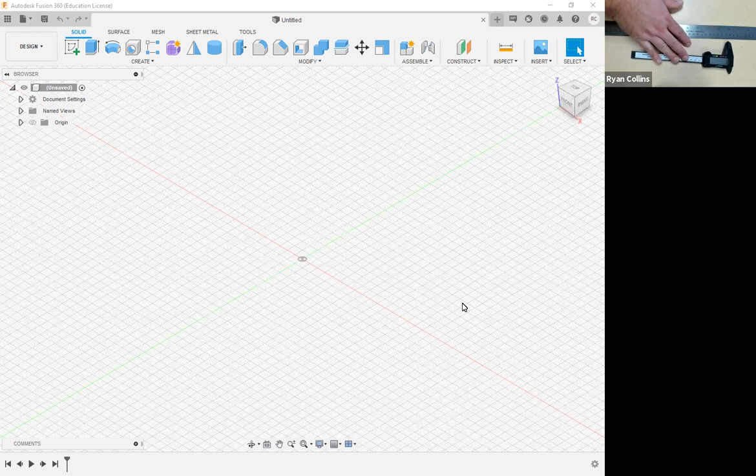Okie dokie. So like I said, going to be starting modeling a hinged object, in this case, a lidded container. Still going to have two components, top and bottom, imported hardware, but I want to build it as a case for my very, very nice Harbor Freight digital caliper. Whatever, it still works, and that's all we need.

Okay, so like we've been starting with a lot of this stuff, I like to build a reference box first. Now I'm just going to build a really quick form of this guy here. So what I'm going to start with is just building. How long is this thing? This is 240 millimeters long, and that thing is about 15 millimeters wide. Cool, cool, and cool. So I'm going to start with a sketch. Basic part. Start with a center rectangle.

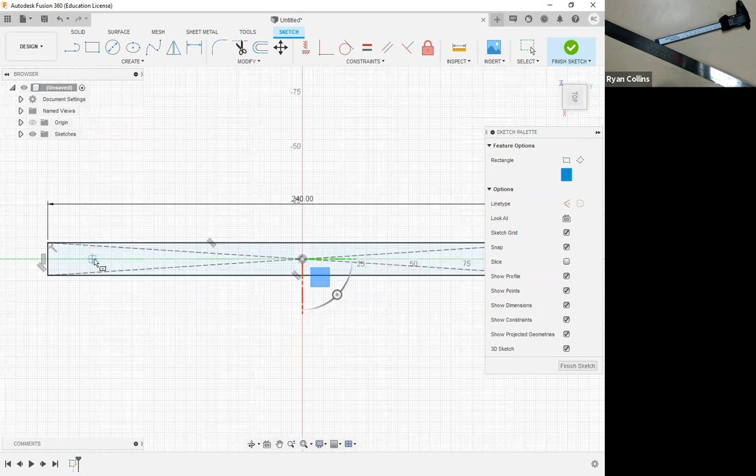Our old favorites. What did I say? 15 wide. 15 by 240. Then it'll have this box here, which is about 30 by 60. Right click, make another one. Let me go to the top just so I can see what I'm doing here. Somewhere there-ish. We will build that better.

What did I say? It was 60 by 30. That'll get moved. Somewhere-ish, and I'll figure that out in a minute. Then I'm going to build this quick little reference here. Again, I'm just building this as a quick reference. Let's see. That whole thing is basically 80 by 30. Something of that out to this. 80 by 30.

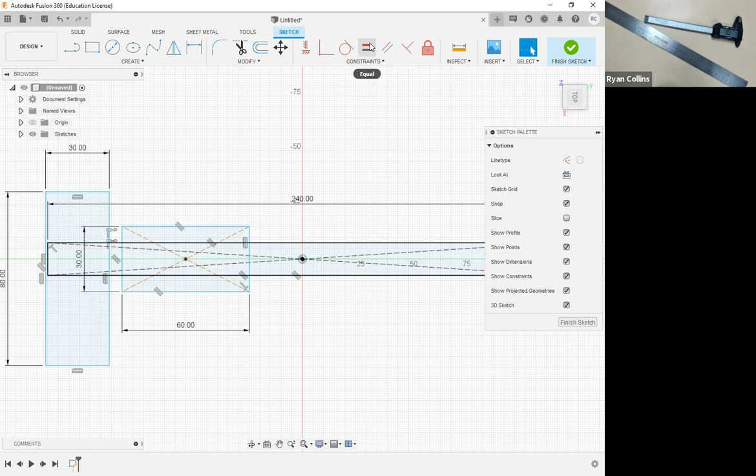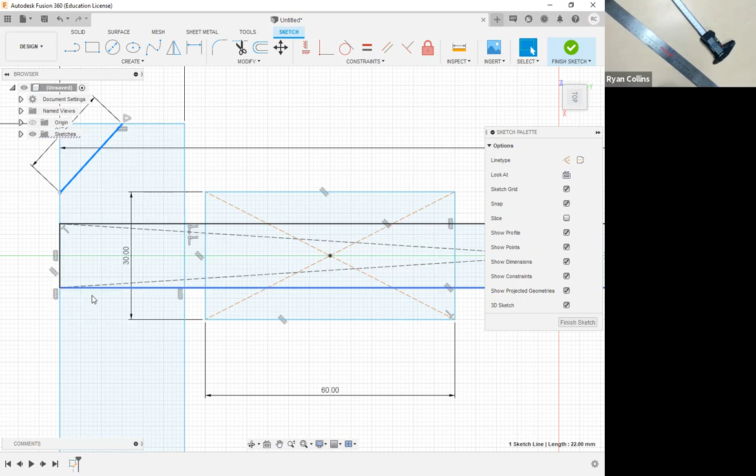I will use some constraints to snap. No, not a coincidence. I'll just move this thing over. Move that over till it intersects with that line. Array for things and stuff. And then just a couple of triangles just to kind of throw that together. Where's the center? Right about there. About 20, so we'll pretend that's about there. Roughly, we'll say 22. Cool. Same. Do something to that effect. Again, I'm just throwing together a quick little reference here. It's not going to be exact by any means, but it's going to give me a pretty good idea.

Model something right through the middle. I'm going to use a construction line as my mirror line so that I can mirror those things. There we are. Select my mirror line. Snap over there. Friggin' hooray. Sort of kind of ish. A pair of calipers. Do some trimming here. Again, obviously you'd want to be a lot more exacting, but I'm just throwing this together so that we can move on with the evening.

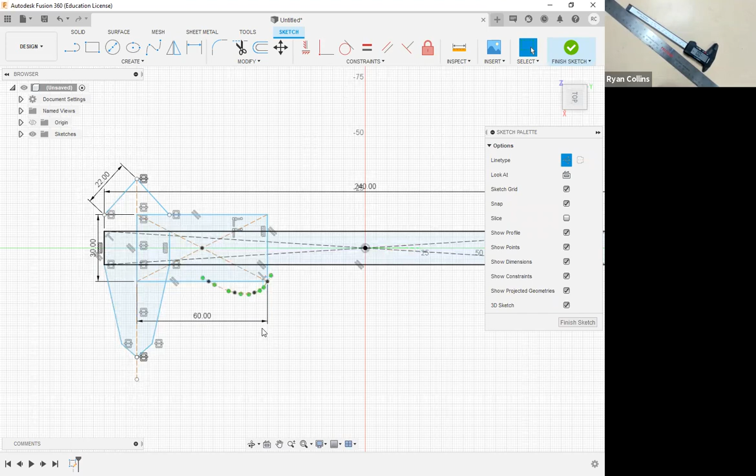And make sure I select my center. Move. That is going to be roughly there-ish. Yeah, there-ish. That seems sort of kind of correct. And yeah, there's a little doodaddly there. So we'll pretend that's the little thingamabob. Did that not connect? Yeah, it's fine. Okay, oops, that is as a construction, change it back over to a solid, super friggin' duper. Okay, so that is roughly a pair of calipers. And same there, that ought to do. Dang it, keep forgetting to turn off the construction line. Okay, so there is roughly an outline for my caliper, finished there.

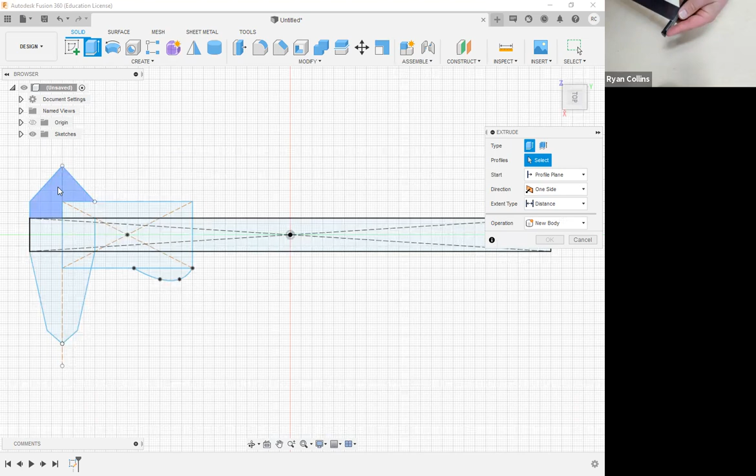And I'm just going to extrude this up so I have my proper thicknesses, which is roughly about 5 millimeters thick on the whole thing. I want that and that and that as 5. There we go. Hit OK. I need my sketches back. Wasn't done with that. You jerk. Extrude all of these parts. And then that thing is roughly, let's say 15 for good measure. That seems about right. Make sure this is joining. Super good. Okay.

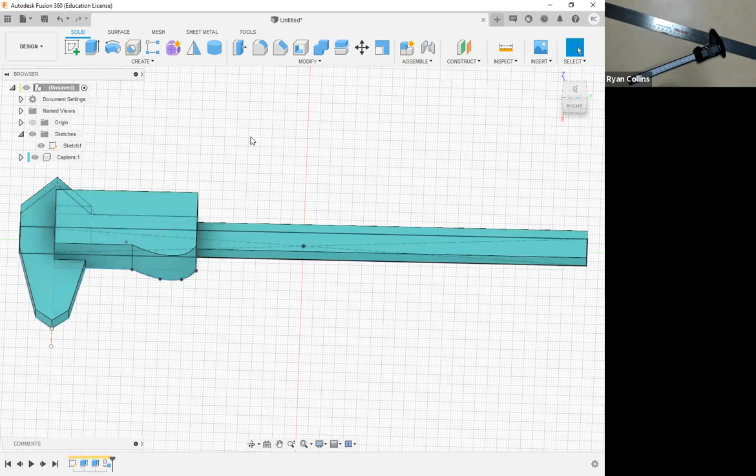Now to help myself out here, I'm going to select this whole thing, which I probably should have done already as a separate component, but I'm going to just transfer my kind of rough caliper thing over as a new component. So I have the very top active. I selected the body. I opened a new component, and that's exactly what I'm going to do. Bleep, bloop, blop. Calipers. Okay. Shift N to switch to component coloring. There we go. Now, other thing, don't forget to save.

So, example, hinged container box. Okie dokie, all right. So that's what I'm working with. That's my first set of dimensions, all of that. Yes, it's very rough, but that doesn't really matter because that's exactly what we're doing, just making a rough model.

Give yourself some extra time, actually do it right, get it right, that sort. Okay, so now I know how big the thing needs to be. How big does my actual box need to be? Well, this part is all very much straightforward from what we've been doing pretty much so far all semester.

How long do you want to make that? Give it a little extra on either side. So if it was 240, let's make it 280. This thing's in millimeters, not centimeters. So there we go, and then we'll say maybe 12. So 120 by 280. Okay, so I'm going to start a new component right from the get-go.

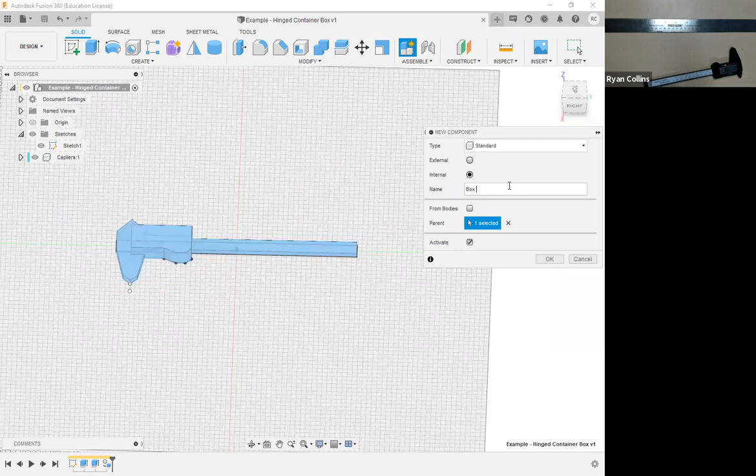New component 2 will be, let's say, box bottom. Okay, I'll start with the old sketch. Snap to the bottom, view from the top. And I want a rectangular from the center because why not? And I said it was 120 by 240.

No, 240 is gargantuan. Oh, that's because I have butterfingers. Not 240, let's make that 280. There we go, that seems better-ish. Great, a little large probably, but that's okay. We can always make some adjustments later.

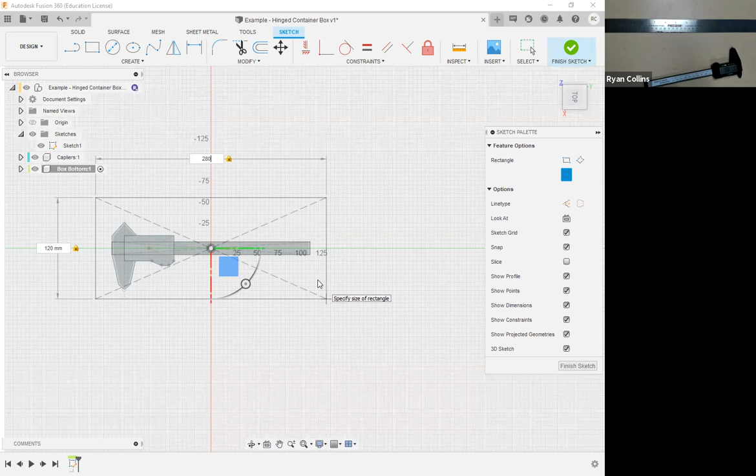Okay, basic sketch is really all I need for right now. Of course, I can round some stuff out. I can also do this after the fact, but right now, I think I will go ahead and put fillets on. All right, so I'm going to go ahead and add a couple of fillets.

So remember, if you want to make everything referential, you can type in the first one and then cycle through the others. But if you just want to keep them pretty much all the same, let's say I'll make that 10. While the tool is still active, go around and select your other corners, and it will do all of those in one go.

Makes it a little bit easier, that sort. But that locks them all into place. Okay, so that's about the size we're going to make. I'm going to show you a few extra things in a minute. But for now, just want to show you building up the basic size, how big this needs to be.

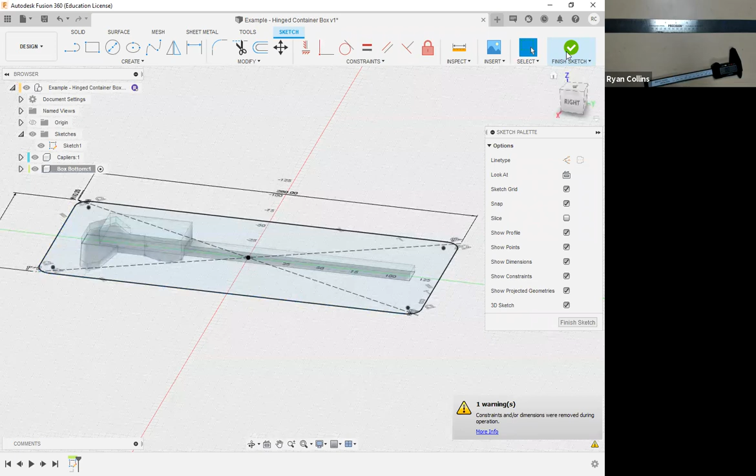All right, finished sketch. Now, I am, of course, going to add a lot more to this. But for now, I'm just trying to see how big does this all really need to get to be. Okay, so looking straight on, now I can see how big I need to start extruding things, that sort.

So for the bottom, I really want this to be a little bit below and above. I kind of want to put this, and this is one of those things of you figuring out how do you actually want to design something. With the hinged object option of modeling an existing object, well, there you go, you have an existing object to take measurements from. Building your own container, well, it's a little potentially more simplified, but at the same time, you're pulling the dimensions from your own plans. So with this, I want it to be a little bit more split clamshell.

So it's going to be recessed. What I mean by that is I want this extrusion to go a little bit below where I currently am, but I also want it to go a little bit above. So with that, I'm going to hit extrude, select that profile. Now, so far, we've been doing either one-sided, we can go up, down, and then we can add another one. But we also have other options.

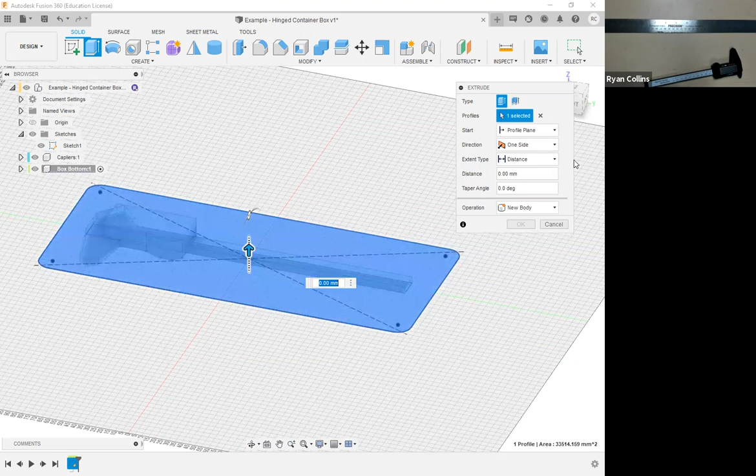There's symmetrical, which of course goes in symmetric sides. It goes up and down at the same rate. But we also have the other option, two sides. I can do right from the get-go my two different extrusions.

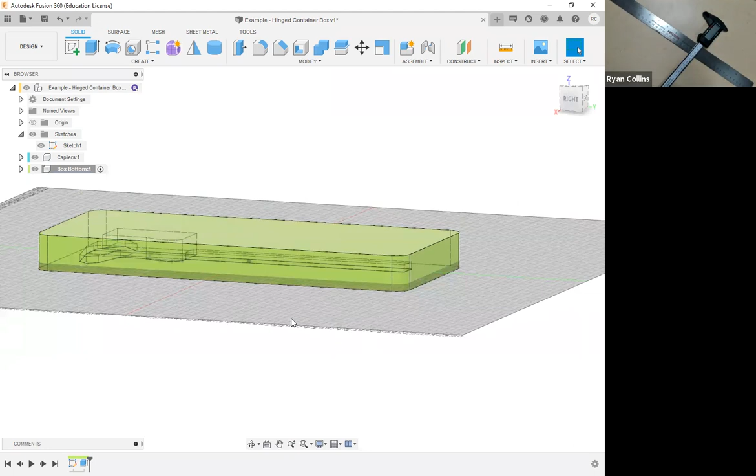So down, I only want to go like, let's say 5, so it's only going 5 millimeters below. Above, let's go, you know what, I want to make this like a full clamshell thing. Let's say 20. Okay, so with one extrusion, I was able to take that profile both above and below the construction plane. Really convenient way of working like that.

So one of the things I could do here also is establish my lid, all of that, and I will do that. But what we've been doing so far would have been, all right, so I've taken this, I can now draw a new sketch on top and extrude downward.

Well, with the loft project, we discussed using the shell tool. This is a really excellent way of just creating a hollow space that is built around the external sides, meaning I'm not trying to build a specific profile to cut in. I just want a general build up, basically just a hollow shell thing, like the tool says.

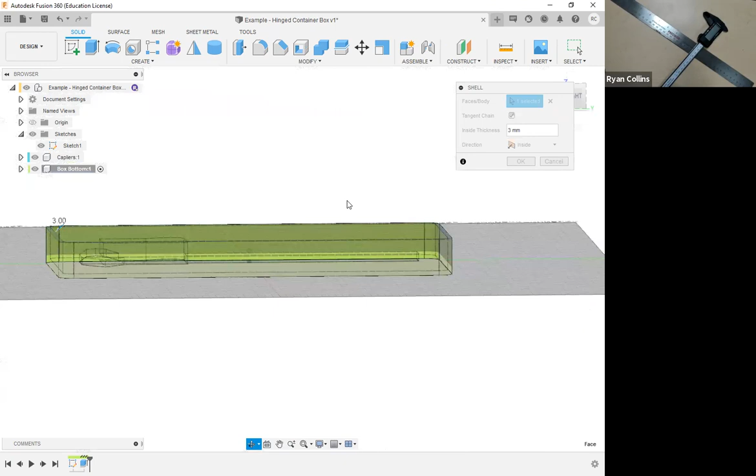So I'm going to select shell, select the top face there, and just decide my wall thickness. Doesn't need to be thick. Let's say 3. There we go. Instantly creates a 3 millimeter all the way around hollow space within this box. Really convenient way of working. Click OK. All right, blam, that's really all I need.

Are there other ways of doing this? Absolutely. But in this case, we'll just do this. Now I am looking at this, you know what, that wall thickness might be a little thin, so I could always go back, edit feature. Let's make that 4. Not exactly a problem. Okay.

So now I want to make my lid. And for this, I'm just going to make a top for this thing. Cool. Well, I don't need to actually build any new sketches or anything. I can use that original sketch. Now it is within the box bottom component, which can cause problems, but we'll deal with that.

Let's see. So first, what I want to do, I'm going to save, and we'll put that as Boodum, because I can't spell. There we go. All right.

Box bottom. Reactivate whole project. Now new component. Box lid. New component. All right.

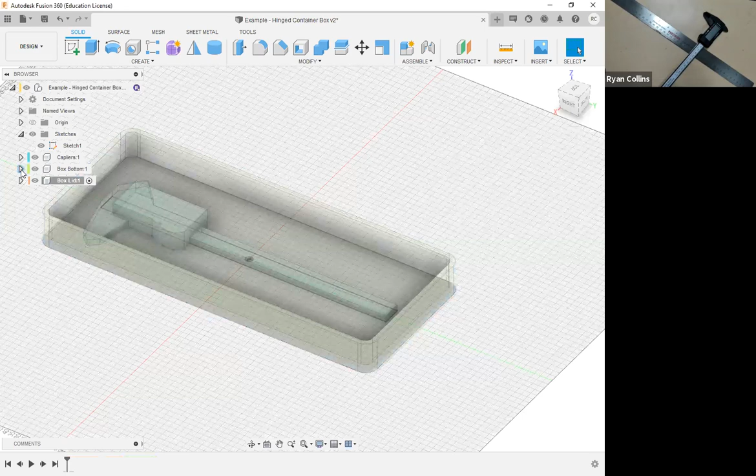So I have two options here. I can either find that sketch, activate it, hide the bodies, and I can still use this sketch, or I can copy and paste it, bring it over. Technically, you've got a third option. You can use the project tool and bring it onto this one. So it doesn't really matter which one you want to try or which one you want to use.

Remember, if you want to copy and paste from one component to another, what you have to do is activate that previous sketch while it's in sketch mode or sketch edit mode. Copy it there. Start on the new one. New sketch, then you can drop it in place.

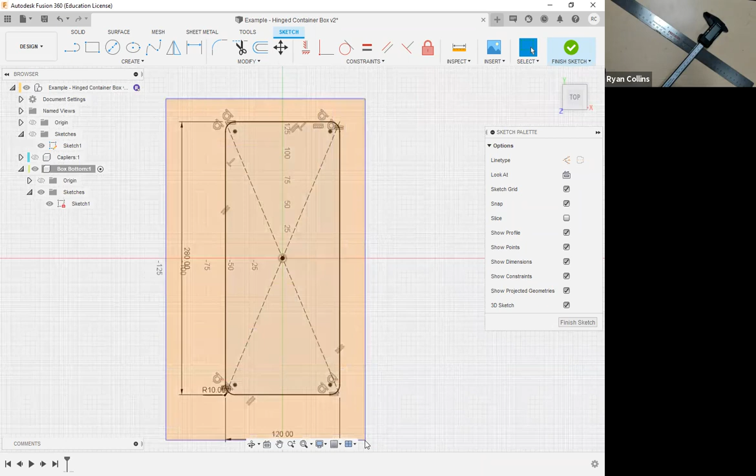So to do that, go to the sketch, and I can just select it off the hierarchy tree. Edit sketch. I'm going to hide those calipers entirely because I don't want those to be accidentally grabbed. So just going to grab the whole to do here. Control or Command C, copy. Finish that sketch.

Now go and activate the box lid one. Start a sketch. Still using on the same plane. Control V or Command V. And there you go. So same deal, no change there, I just copy and pasted.

Like I said, there's multiple options for this. I chose this one just to go through the process again. Okay, finish sketch. I can unhide the bottom if I want to. And who doesn't? Whatever. All right, same deal, working with the same sketch. Mainly, I just want to double check that I am starting from there.

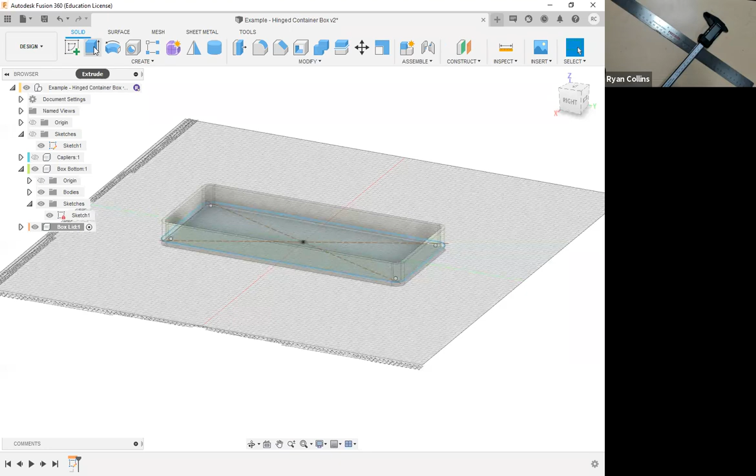Now, yeah, you could measure this top. It was, what was it, 20 millimeters? Great. But I'm going to start the lid here, and I'm going to do a simple extrusion again. I'm going to select that sketch profile.

Now, it's going to cause some problems because it's trying to select both versions. So you want to make sure to hide the other component there, just so it's easier to actually grab what you want. You can unhide it after you select it. Now, like I said, for the bottom, I can extrude in multiple directions at once in different ways. However, this sketch is still down here. Well, I want to build a lid for this, but I don't want to move that sketch, whatever.

The other option, again, is your start. So far, we've been using start for the profile plane. The other options are you can set in a defined offset, which is basically like working from an offset construction plane just without actually building one. The other option is from object. You can just select another object for it to start from. It has to share the plane in parallel, but so long as that's the case, you can do that.

So what I'm going to do is I'm going to select the top edge of my bottom container, or the bottom of my container, and now my extrusion will start from right there.

Slicker than snap. All right, so the top, it's just a lid. So let's say, well, I do want to put some tapers and such like that to it. So let's say, yeah, 10 works. Okay, cool. There we are.

Same deal. Now I can do the same. I can make a hollow shell inside of there. Let me hide the lower component so I can see what I'm doing. Make it the same, 4 millimeters thick. Great. Okay.

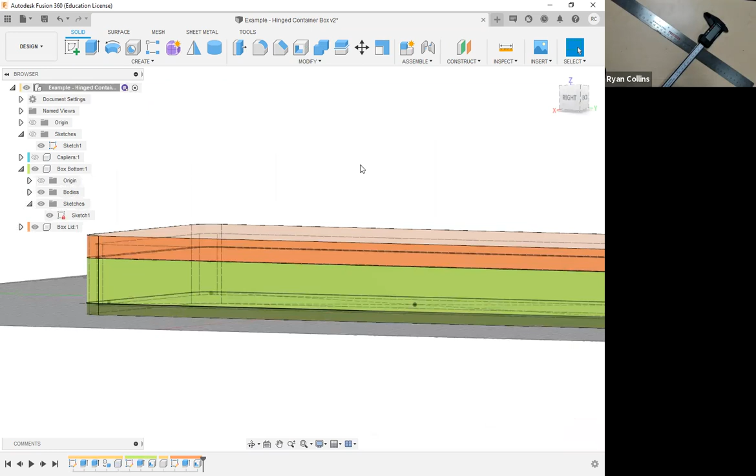Reactivate the hole to do. And now you can see what I'm working with here. Let me hide, let me change the visual display just so I can clear up a little bit what I'm doing. So right now I have a container, not very exciting. I'll add some fillets and all kinds of fun like that to it. But right now it's just that square, or it's a rounded side. Hide the bottom, you can see inside that stuff, and I'm going to have my calipers nested in there. I'm going to make an insert to take up the space for that. Cool. All right.

Next up is I want to build in a hinge for this. Now with the hinged object, let me go ahead and save this real quick. It made.

With the other hinge object model, again, you were working off of something that existed, and it had a built-in hinge as part of the form. You know, pliers, scissors, that sort of thing makes sense. Well, a lot of times you have, sure, you can have external hinges, things like that. Think of like literally any box you've ever seen. You're going to have either bolt-on hinges or it's going to have them molded into it. And in this case, I want to mold them into it.

And the easiest thing to do with that is simply starting from a circular form or a circular sketch and then building tabs that either fit the top or the bottom. And then we'll extrude them to match.

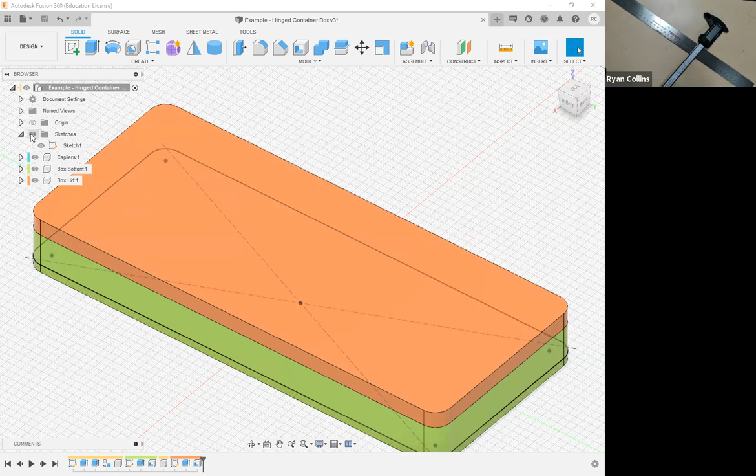So what I'm going to do, I'm going to turn the box to wherever you want to orient your lid to start from. In this case, it's going to start from the back, pretty much right on the center here. I'm going to start a sketch. I can't get to the actual origin right now, so let me hide these guys so I can see the thing. There we are. Now unhide stuff and I can see what I'm doing again.

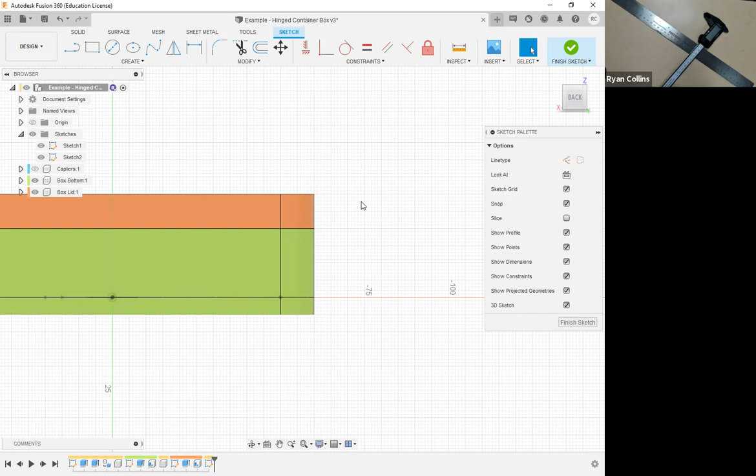Now, just like the other one, or really anything, you can base this around hardware you already have in mind, or you can build it to then find hardware to fit. 6 millimeters is usually a good one. It's kind of overkill for this, so make it a little bit smaller.

So I'm going to start with just a simple circle, and I want it to share this line here. So I'm going to build it somewhere out here. And the first one, let's say I'm probably going to use some 3mm threaded rod. So I can just use, first circle is 3. And with this, I'm just simply building something right there.

Now I'm going to build another circle out, and I'm going to have this out to actually make contact with the sides here. All right. So this is going to be my hinge, tiny little hole in the middle. Yeah, it's kind of overkill, but whatever.

Now I'm going to build some tabs that go to either the top or the bottom. And they're all going to be shared in the same part, or in the same sketch here. You just select different ones. Makes it a lot easier.

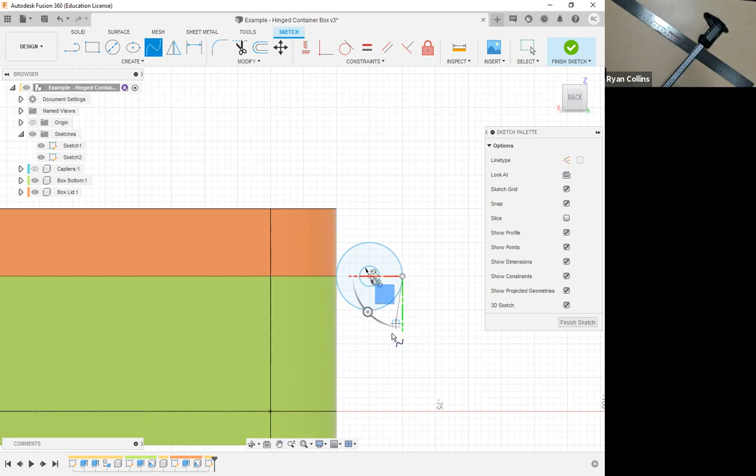All right. So to do something like that, let's make it a little bit mildly fancy. So I'll start from the top here. I'm going to use a fit point spline, and I'm just drawing something over to where it matches to that side.

Now, one quick thing to note, if this were a closed sketch, this would have given me the blue hue there.

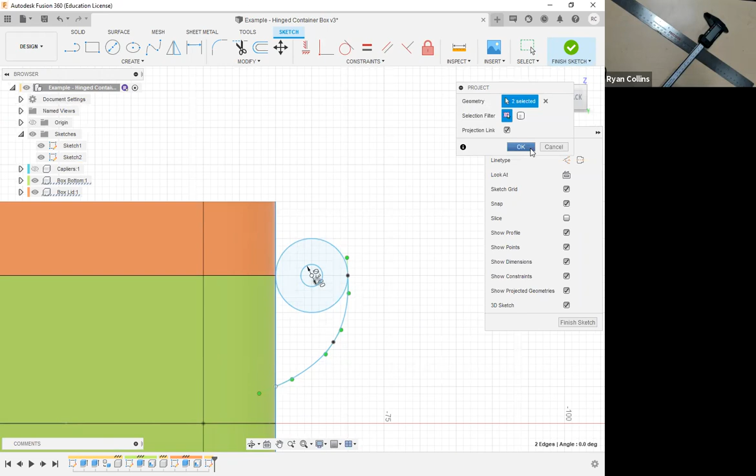So the problem is I can either draw in a line here, or what I could do is I can use the project tool. So press P, and I want to select specified entities. Yep, I don't want the whole body. I want to select just the edge of the lid and the side there. Click OK. Now let me hide the two parts. Now it is shared just that outside edge line, and now my hinge has filled in.

Easy way to work. Do the same thing for the top, but we'll just do a straight line. So let's start there-ish, and then I will mouse over the circle till it gives me a tangent symbol, or I could have used a constraint. That works too. Great. That's all I need.

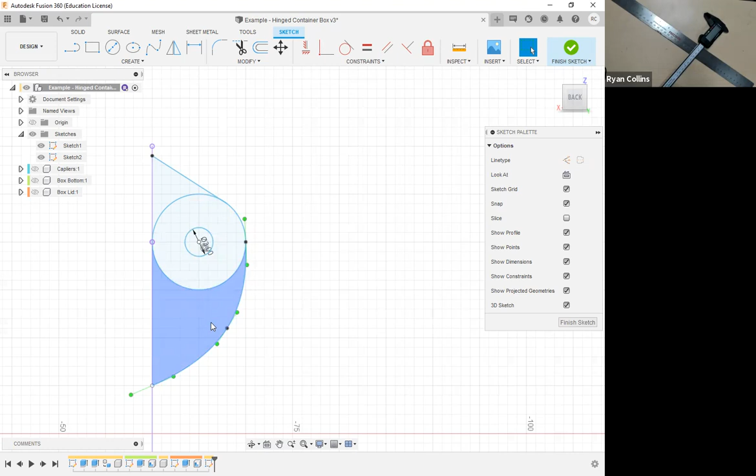So really all I need for this is, again, a center diameter circle for whatever hardware I want to use. I'm going to use a 3mm threaded rod. The outer part, which is really just the actual barrel of the hinge, and then the tabs that either go to the top or the bottom. These can be really whatever you please. But again, like we were just talking about design, think of something that's going to be thick enough so it's strong enough when it's printed. Unhide the top and bottom. Okay. Finish sketch. There we are.

So now I have this sketch that is on the main component. It is not on either of these lid or bottom components, but the good thing is that means it can be shared by either. So I have this center hinge here. Cool. To create a type of hinge, now I'm just going to make a basic barrel hinge with a center and then some sides. One part fits on the bottom, a couple parts fit on the lid, vice versa. Frankly, it's totally up to you how you want to design this. We can even make it more complex, but here we go.

So I'm going to use Extrude again. For the bottom here, depending on if I want to connect this right in one go or I want to connect it later, make sure that the component you plan to be working on is active. I'm going to go ahead and select the active component. So I'm going to select bottom, top ghosts out. Now I've got my extrude going again.

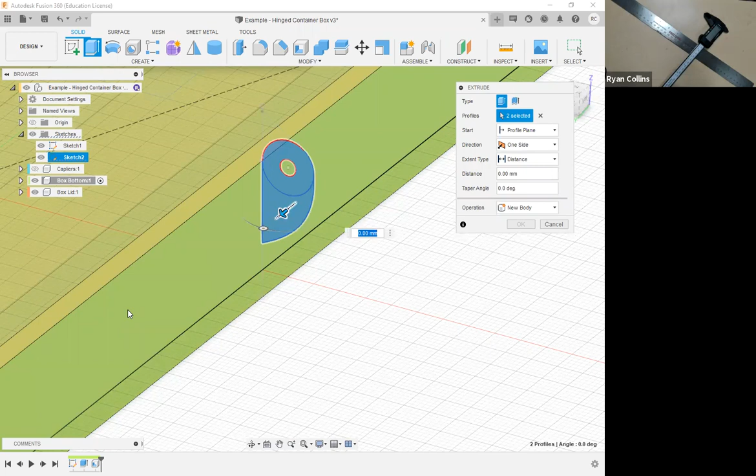I canceled it before. So now I'll show you, I want to select not the center, but I'll select that ring. I want to select the bottom tab. As I extrude this out, it builds a hinge directly built onto my form. Now with this, let's do symmetric. And I want this to be 50, seems reasonable. Sure, great. I can always tweak that sketch later. That's fine. So for now, there we go.

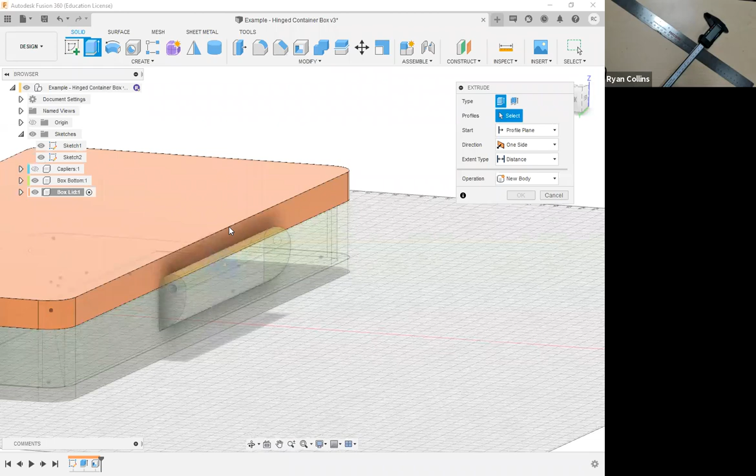Now I need to create the opposing hinge for the lid. So I'm going to switch, activate the box lid. I need to unhide that sketch because it hid it again. Extrude again. Now you can only do one side at a time. Even though you can technically extrude two sides opposing, you can't start them out on either end. So that's the only trick to this. So same, I need to select the circle and I need to select the top tab.

But like I said, instead of extruding directly, and let's just make that 20. I don't want that directly there. I want the start to be, oops, not there, from an object. And now I'm going to select the face of my other tab here, and it just starts it over there. Great, that's all I need.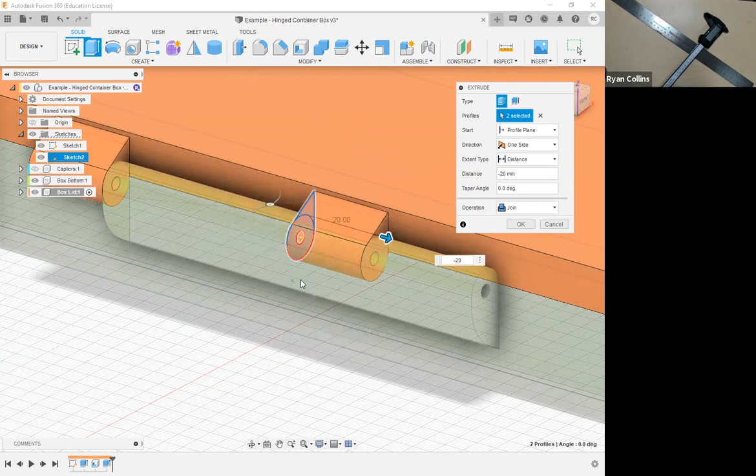Make the other one, right click, repeat extrude, orbit over, select the circle, select the tab, make that 20. Only I want this to be -20 because it's going the other direction. And start from object, select that face, black. There we go. So that is a really easy way to make a type of hinge. Now, I still have the parts I need to add to it, like importing the hardware and activating the actual joint.

Now, is this the only type of hinge you can make? Oh my, no. Do take note of different hinges. But this is a really easy way to make a simple hinge. You see how I could easily add more tabs.

So if I wanted to make this like multiple fingered hinges, that works too. This is just one solid open thing. All right, so I do want to connect these two with a joint. So I'm gonna go up, select joint. My motion is a revolve one.

Now this is where this thing kind of gets a little tricky. Technically, I would like to get this smack in the middle. And you can see I can select it inside of that tube, but it gets a little awkward. So do your best to try to see where you're working. If you're having trouble seeing it, hide components that you don't need to see, and then you can work from there. Now, is it imperative that you get your hinge smack in the center there?

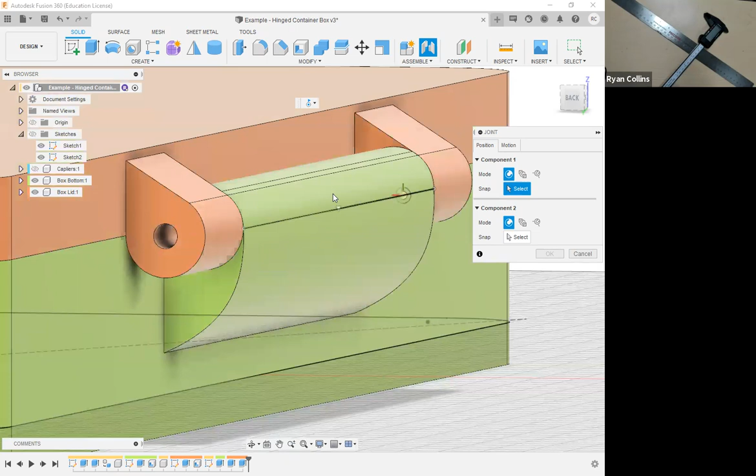Not really. Since the two sides share a face, or they technically share a couple faces, what I could do is I can just make one side fit here, unhide the lid, hide the bottom, the other one right there, and now you got that.

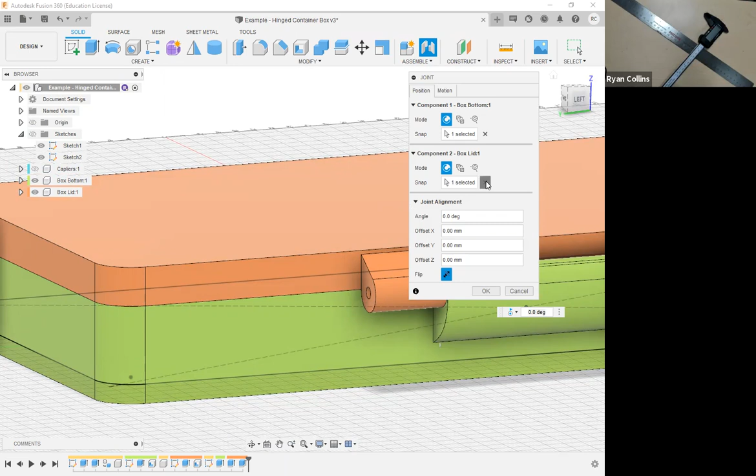Now the problem is I did that backwards. Remember, what you select first is what will move, and what you select second is where it will move to. So I did that backwards. So I'm going to cancel that and then just swap them, that's all.

So I want to select my lid first. Command, hold right there, unhide. And hold right there. There we are. And motion is still there, there we go. So now the lid actually is the thing that rotates. That's all.

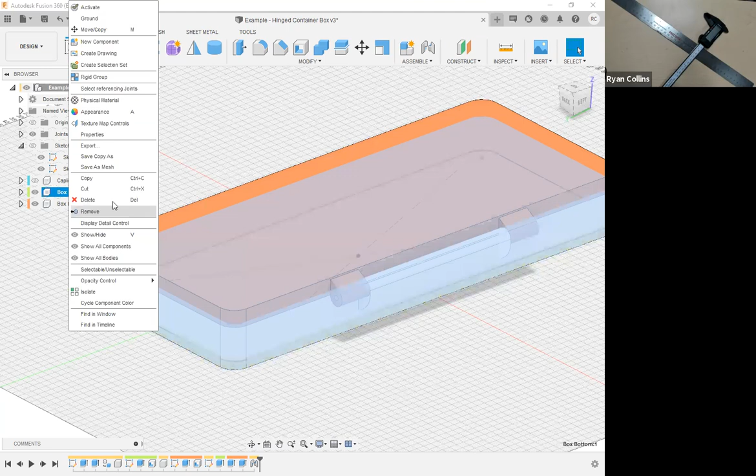All right. Don't forget when you're working with joints, don't forget to ground the component that doesn't move. So I'm going to right click on the bottom box component. Second from the top is ground. Now that will not move. So I can click and drag the lid, and it will not move that bottom hinge. I don't want to capture the new position. We'll revert.

Now I do want to go in and mess with the joints, but first let me save. If I can spell. Oh, that should have been the hinge. Yeah, whatever. You get the idea.

Expand the joint. There we go. I want to set the maximum. Really, that's just going to be 180. So I know perfectly well that's going to just open and close to that size. There we go. Going the wrong way. There we go. You can just use the flip command if it's going the same distance, just in the wrong direction. Just use the flip and it'll orient it a different way. Okay.

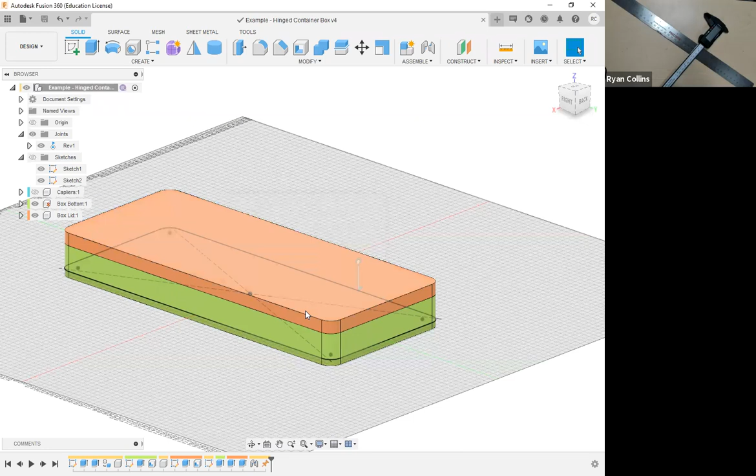Now, like I was saying before, a couple of things about any of this stuff. I'm going to go ahead and save. Joint limits. When you're adding strength to your form, definitely look into things like fillets. You can certainly do like a face fillet on the top. Let's say 1. What's the problem? Is it too big?

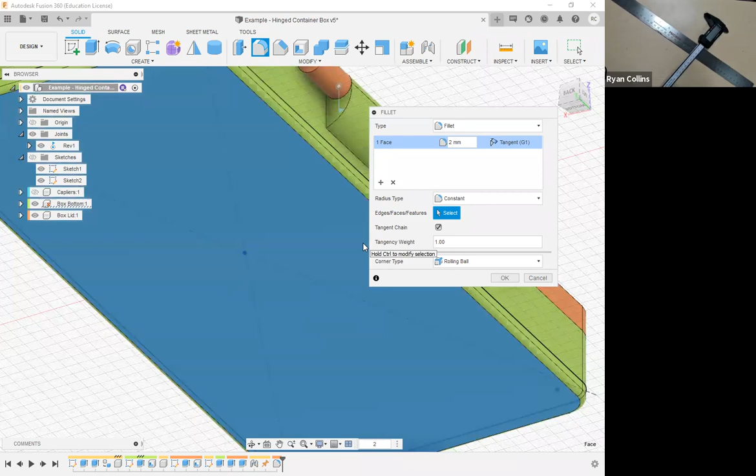This is what I was worried about doing that drawing here. So my fillet on top won't allow me to go any further because I made my tab there. So this is where you definitely want to decide if you want to add these sort of features before you add any of these parts. So I'll do a little round over, another fillet, bottom. That I can make much more rounded. Let's do 2. So now the bottom has a bit more round to it, super freaking duper.

We can certainly add things like clasps, things like that, and I will do something like that. But first I want to show you the other part of this, the insert. So let me start one more. Insert, if I can spell. There we go. Okay. So with this part, I'm gonna go ahead and hide the lid. That's fine. Reactivate the whole thing so I can see what I'm doing here.

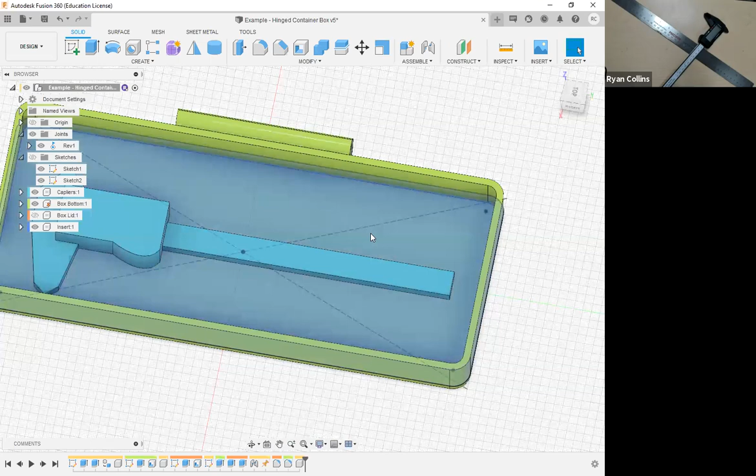And the calipers. So what I want to do is I just want to create something that fits inside of here, but also fits here. So this is where you're going to start using the project tool or the like, to either start from sketches or just straight up start from the existing forms you have.

Does anybody have any questions so far, by the way? I mean, this part's all pretty straightforward except for the hinge parts and stuff like that. Okay.

So what I want to do is I want to create a just material insert here. And to do this, like I said, I can use the project tool, anything like that. That's probably going to be the easiest way to start this insert for this part. So what I'll do, activate my component, and I want to start a sketch

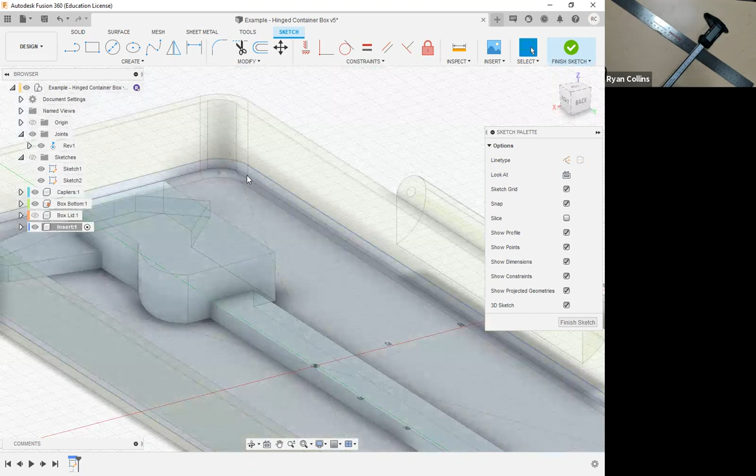on that inner plane. But what I want to do is I want to try to grab, and this gets a little awkward because I put that fillet in there. I want to use the project to grab the inside edge here. Now, the good thing is I can just mouse over that, and I should be getting, yeah, it's just selecting just that inside flat surface. So great. That's all I want. That's all I need for that.

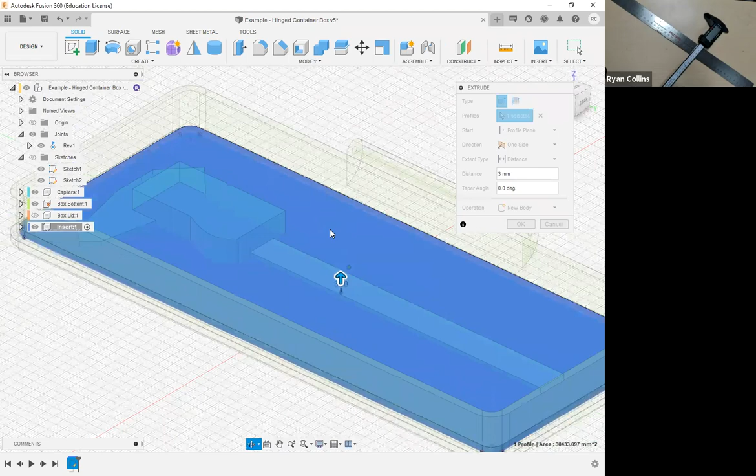Select OK. Now, yes, I can also select the profile of my caliper, but I'm going to show you a different way to do that. So, all right, finish that sketch. Great. Now what I'm going to do is another extrude for that sketch. And let's make that 3 millimeters thick. Great. That's a new body, all within that component. Super friggin' duper. Make sure that that is actually the thing.

Great. Okay. So let me activate the whole project again. You can see a little more clearly what's going on. So basically all I did is I just made an insert. If you've ever seen a box for these or anything like that, it'll probably have like a foam material or something like that. Really easy to work with. Okay.

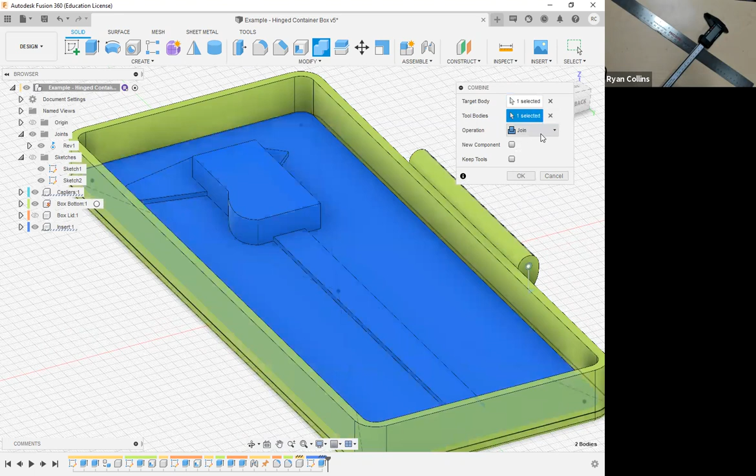Now, what I'm going to do is I'm going to use my combine tool. Basically what I want to do is just cut away this whole caliper thing from this part. So my target body is there. My tool body is the caliper, but I don't want to join. I want to cut. Now, don't forget to select the checkbox to keep tools, because you could make a custom tool, whatever. What that refers to is just simply the other body that the first is interacting with.

And if you wanted to make a blank recess, then it'll just automatically delete that tool. However, I super don't want that. So I'm going to select that, and it's going to keep that caliper component. Hit OK. Great. Now, basically, I have an insert in there. Let me hide the calipers. That's simply it, it fits that same profile.

Now this, I could add little things, you know, there's always things that you often see, like little spots for other batteries, things like that. It'd be super easy to hold onto there. You could also move this over, add pens and pencils into here. Yay, I've made a pencil box, that sort. I do want to add a little bit of thickness to this. I'm going to add that to, let's say, 5. Great. Recalculated, same thing. Box lid, super freaking duper. Okay.

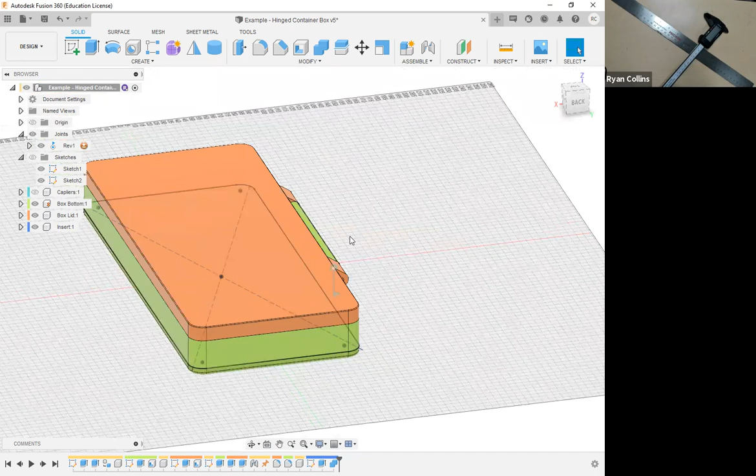Last thing, hardware. So I'm going to need something that pops in between all of that and then has end caps. So I'm going to go to Insert, McMaster-Carr. Sometimes it takes a moment for this to activate. Well, apologies, give you a moment. There we go. And instead of screws, I want threaded rod.

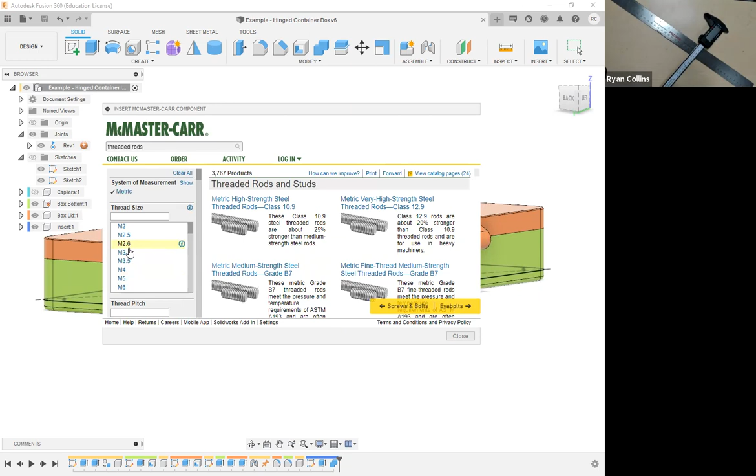And yeah, we're going to use metric because it's already built on the metric. I'm going to use M3 because it's a 3mm hole, and stainless steel because it's the bestest. Now the problem is you've got to make sure that you have your measurement first. So I forgot to measure that first. So that's okay. Let me cancel.

And what I need is to use my inspect tool, measure. I want to measure from this face all the way through to this face. That is 140mm. And then I'm going to add a little bit more so that I have some space for whatever nuts I'm using.

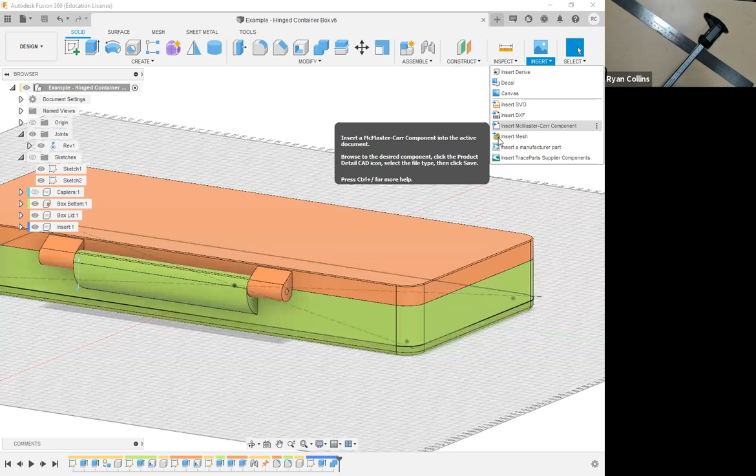Back to McMaster-Carr. Oh, it almost saved where I was. Metric, M3. Stainless because it's best. All right. Well, the next closest is 150. So that's not a lot of extra space, but I think it'll work for what I need to do. Click OK. Brings up the thingy thing. Totally technical. Product detail. Don't have to go all the way to product detail.

Remember, you're not using SolidWorks. I'm going to scroll down and you want to use the step file. Now it does give you an option, step with no threads. Like we were talking about with the thread, anytime you're modeling threads, you can use a checkbox to either model them or don't. It saves space as far as visual calculation, but it's a simple enough model. So I'm going to use step, so I'm going to keep the threads. Download. And blorp. There we go.

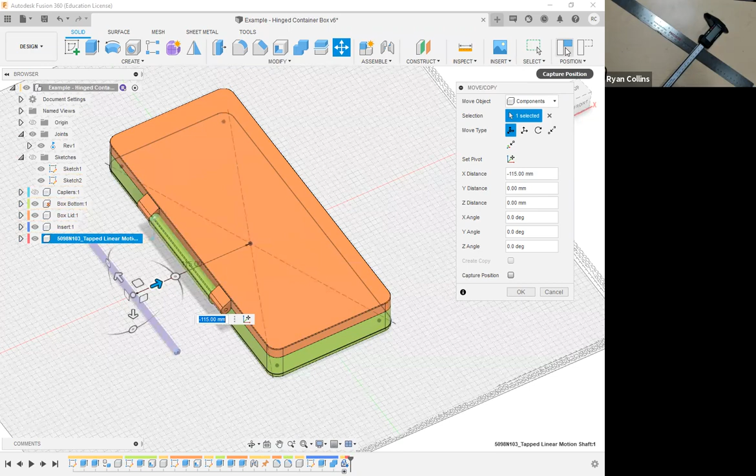Now with this, I'm going to orient this first because that's going to be really confusing otherwise. And then I'm just going to move this out of the way. I don't want to place it just yet. All right, move copy. I'm going to capture the new position. Great, it's in. What is it? What did I get? That's not threaded rod. That's internally threaded rod. I grabbed the wrong thing. Or it might be the wrong link. Always possible there.

Let's just see. Oops. No. I need something that's metric. M3. Length 150. Yeah, somehow it's kicking me over to tapped shafts instead of threaded rod. Well, that's hecka weird. Very strange. Give me a moment. Just trying to figure out what's going on here. Threading, fully threaded. There we go. That's what I need.

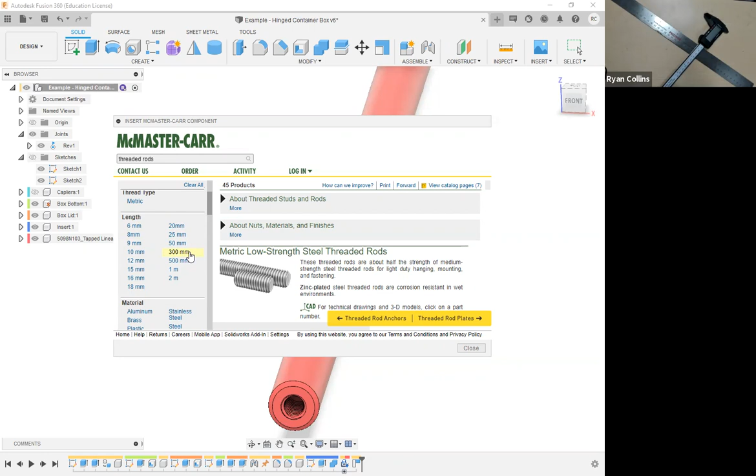All right, so problem here is those are totally larger than what I actually need. So in reality, what you'd be doing is you would be getting something longer and just physically cutting it down. We can actually trim this model. So I'm just going to bring this in. Sure, 300mm, way bigger than I need it to be, but whatever, it'll work. Saves my step file. Great. Go on. Sorry, calculating, thinking, robotifying, whatever have you.

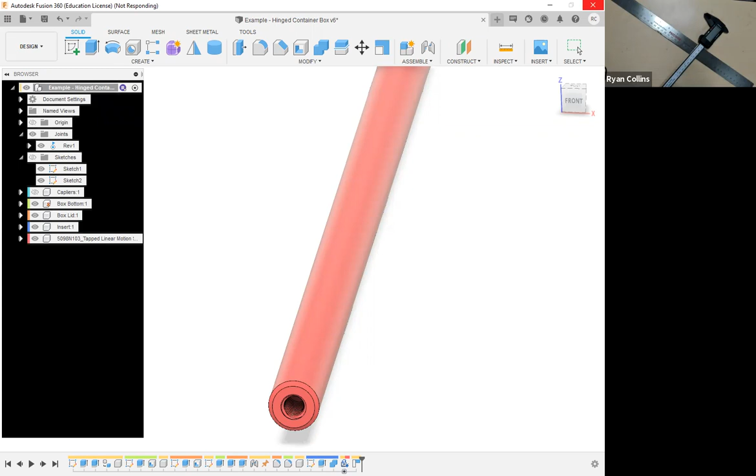Okay, finally loaded. So again, this is much larger than it needs to be, and I'm going to try and trim the model itself. Just going to orient it, plop it over. Super good. There we go. So this is, of course, what it means when it says threaded or not threaded. Having it fully modeled like that totally does bring some problems in. All right. Capture new position. That's fine. I do still want to get some nuts for that.

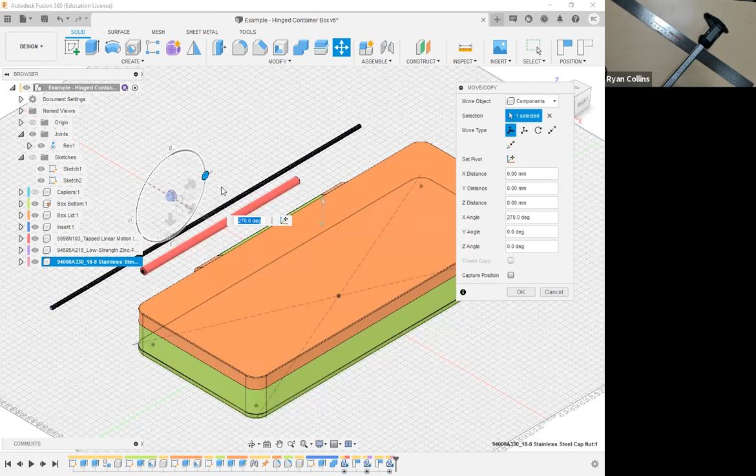Metric, 3 millimeter. And let's find something fancy. Let's use some acorn nuts. Because stainless is the best. Not really, but it is useful. Bloop. Okay. Get that out of the way. Let's orient this at least so it makes a little more sense. There we are. Zooming in on that. Great. Super good. Yep, capture position. That's fine and dandy.

All right. So for this part, yes, we are going to need to trim this rod, but we'll do that later. Main thing I want to do is I just want to plop it in place. I'm not sure if it'll let me trim this down or how well it will. So the first one was totally not the right thing. Actually, let's just go ahead and delete that entirely. Yep, don't want that at all. Okay.

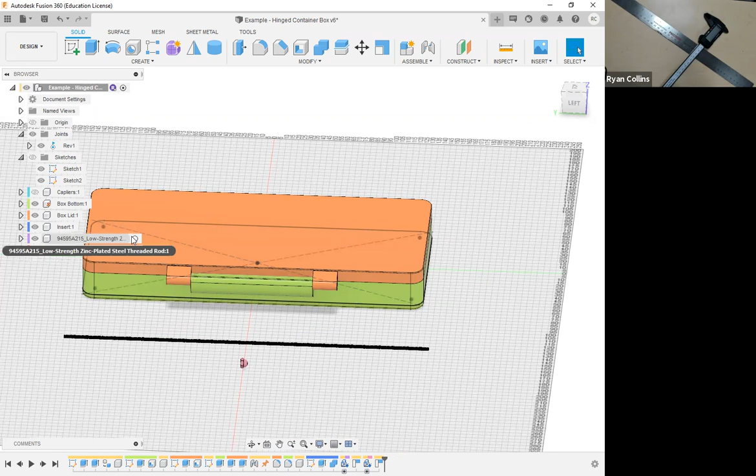Let's activate this, and I needed that to be, oh crud, I already forgot. Was it 240? Measure up to there and there. Between those, it is 140. Okay, that's way off. All right, so I need this rod to be more like 150 millimeters or so. So what I can do for this is I can split this model. It's still a solid body, so I can just chop it up. So the thing is 300 millimeters long, and I only needed about half. So cool.

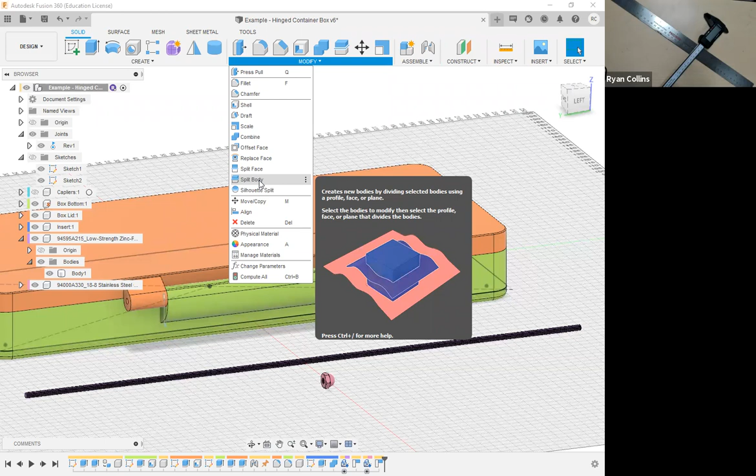What I can do there then is I can go to modify, and I can use a command called split body. Now this will let you chop any solid form based off of whatever profile you create. You can draw this as an actual profile, like a wavy line, whatever have you. So for this, I'm going to go to the top. And since I know this is 300 and I only need 150, let's draw a sketch. Oops, cancel that.

What I want to do is activate on that component, because might as well add it to there. Sketch right there. Now first, let's draw a construction line. Press X, starting at the end here. And I'm just going to draw upwards a little bit so I can see what I'm doing. 90 degrees. Let's make that 10 out.

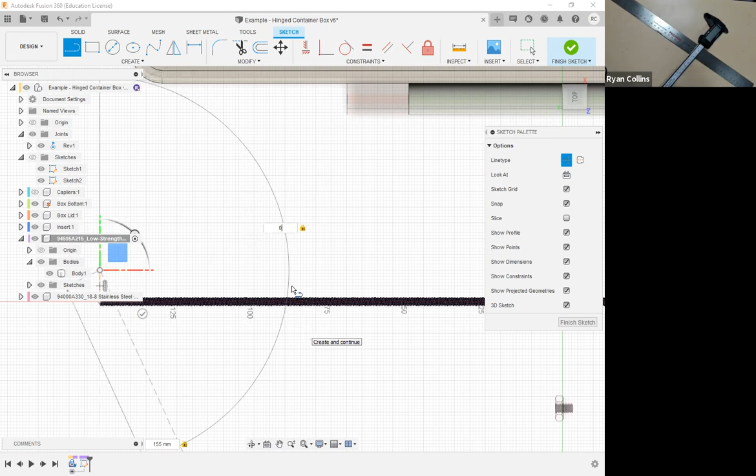That's fine. Now I'm just going to draw over. Let's give myself a little bit extra space, make 155. Not 155 degrees. I want it 155. Oh, Christ. Come on. There we go. Accidentally didn't tab over. So there we go. Need a line that is now measuring over 150 millimeter, or 155 in this case.

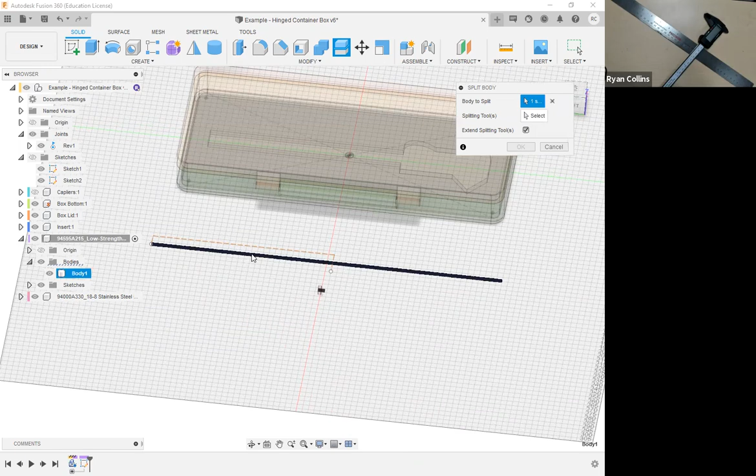Cool. There we go. And now I want to change one more line. Straight down, doesn't really matter. There we go. Okay. Finish sketch. So what that's going to do is that's just going to provide a line for me to split with. So we use a split body tool, select there. Body to split is that whole threaded rod. So now it's highlighted. Splitting tool.

Might not let me select that line because it is construction line. Yep, that's what I thought. Just wanted to double check. Okay, go back to that. And let me just change that last line to a real line. Oh, a real line. Yes. Back to it. Split there. Splitting tool is that line. What's going on here?

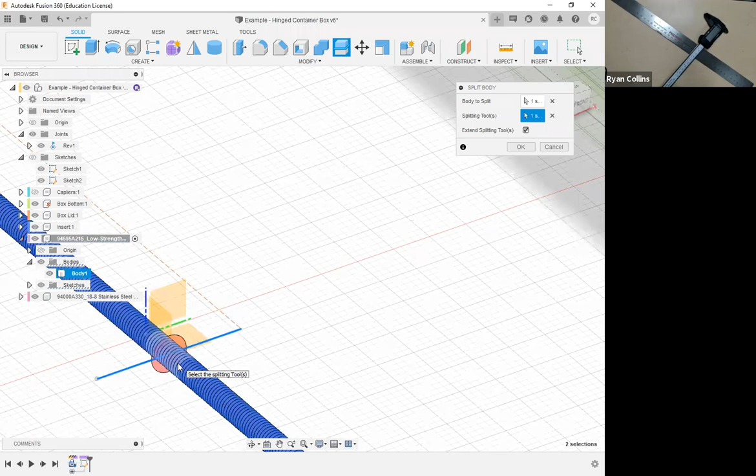And it automatically assumes that because that line crosses that body, it's going to build itself a little miniature plane, show you that it's cutting there. You can select the extend splitting tools or deselect it, and it'll just go all over. It just goes to the extent of whatever your cutting line or feature is. If you check the box, it just keeps it small like that, just in case this was inside of a model, you don't accidentally split other things. That's all. So cut that.

It's going to think about it. Now, what was 1 is 2. So I'm going to hide the one I don't want. And there we go. So if you can't find exactly what you're looking for, you can always chop it down. Makes it a lot easier. Because you're importing these as a solid, not as a mesh, it's a lot easier to work with. Okay, now I can move this threaded rod in place.

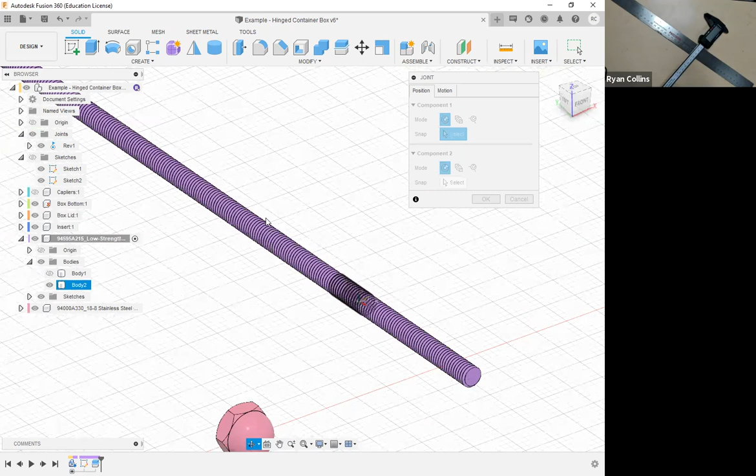Now, with the threaded rod, it's definitely tricky to do this. So let's see how this works. But I want to use a joint to move this threaded rod. So let's see how easily I can even do this. I'm really not sure if it'll let me. Yeah, because threads have all these other faces, it's really hard to deal with sometimes. Yeah, not really letting me do this very easily. What I'm trying to do is just select somewhere in the middle.

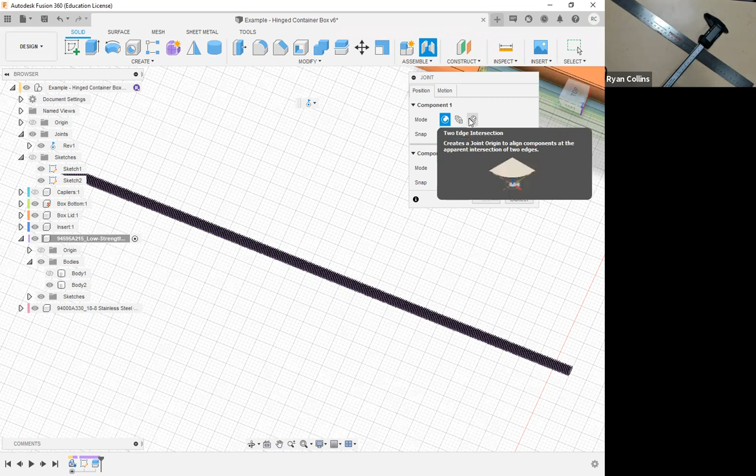So when you have something like this, where it's really tough to select inside, one of the things you could do is you see these other options for mode, simple. That's when you're just selecting something in the center there. You have other options, edge intersections and between two faces. So what I can do is select the between two faces, and I'm going to select either end of this threaded rod. So between that one and that one. And now it knows that I'm trying to select smack in the middle.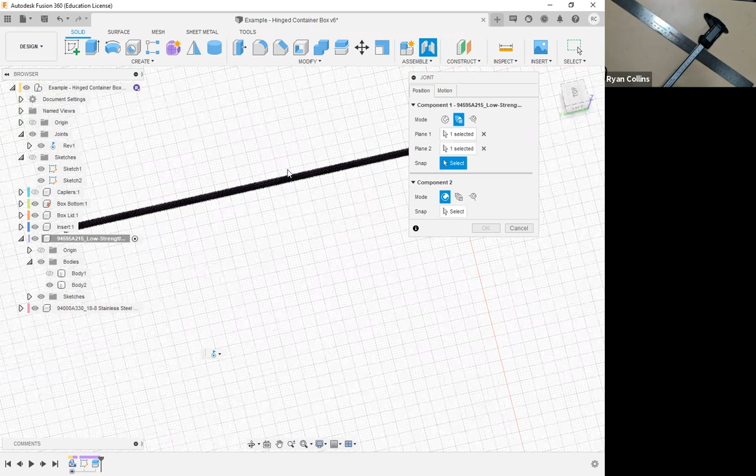So there we go. It sees my selection point is between that plane, and now it's just asking me where I really want to put that. So snap, yep, to, let's see here. Trying to find the middle. Probably should have drawn that out. Yeah, sure, right there. That is definitely not where I want it to be.

This is always a pain with this stuff. Still trying to select smack in the middle, and it's not really letting me because it's still wanting to select along those surfaces. Just want a rigid point.

That should work. All right. Now I'm going to do the same for up here.

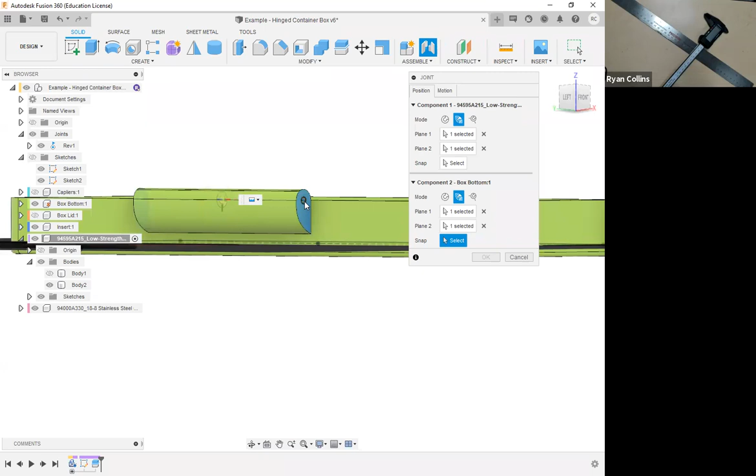I want to attach this technically to the inside of the box bottom here. So I'm going to hide the lid, do the same between two faces, right there and right there. And then my point is a lot easier to get at. So it snapped to right there. Great. Oh, it didn't finish snapping the first. Fine.

There we go. So what I did there is I selected just the center of the two faces, and it decided that, yes, it wants it right smack in the middle. So that is now lodged smack in the middle of the bottom of the box, inside that tube I created. This is one of the ones where you just kind of got to play with it a little bit. Oh, nope, I did not get it smack in the middle. So clearly it's not where it needs to be. If you run into something like this, you can still keep trying to get to the center, but you can also modify the placement of a joint. This is just a simple joint alignment offset.

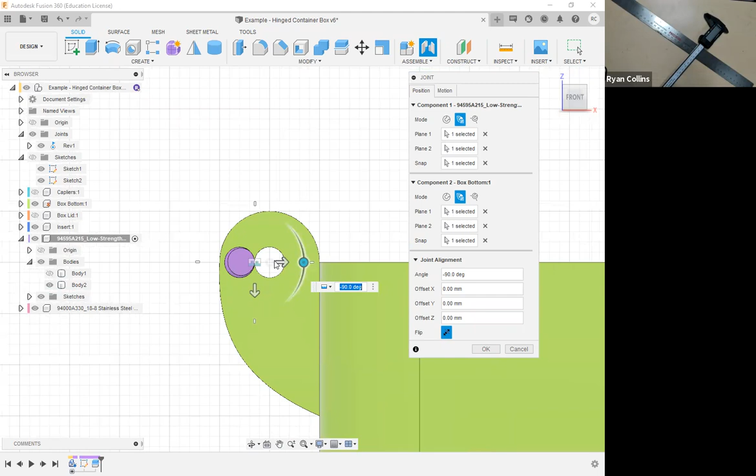So what I'm doing here, now I'm going to use the arrows and just drag it into place. There we go. It just didn't select it right exactly where I wanted it to go, and where it probably didn't select properly was inside that threaded rod. So that's where it gets problematic.

But now I've snapped it in place. That's what I want. I select it as a rigid joint. I don't need that to move at all. That's just going to stay right where it is. Great. Hit OK. That's all in there now. So it's another joint. Super good.

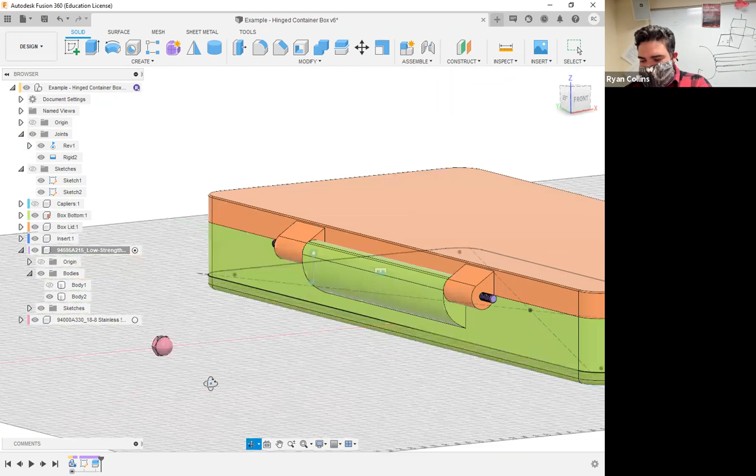Now let me unhide the lid. Now I want to put this nut in place. The thing is, I've only got one. I need two. Well, obviously I can tweak that later, or I can just copy and paste and add a second one. Not a big deal.

So let me activate that component. Open that up. Bodies. There we go. And that just means copy, paste, added a second one. I'm just going to move it over a little bit just so I can see what I'm doing there. Click OK. Great. Just copy and paste it the same one. It's all on the same component. No need to change anything.

Okay, now right now I have this bottom, or this component, the acorn nuts activated. I don't want to do that. I want to go back up to the very top, activate the whole project again. Now I'll add the joints to this.

Now what I'm doing is I'm not actually adding the joints to the threaded rod or anything like that. They're not technically linked. I'm just placing them for this project's purpose. That's all you really need to do. So I'm still using just a rigid joint. I'm going to select joint.

Now I'm going to use the simple selection. This first nut, select the face or mouse over the face, press and hold control. Now I can snap there. That's going to move.

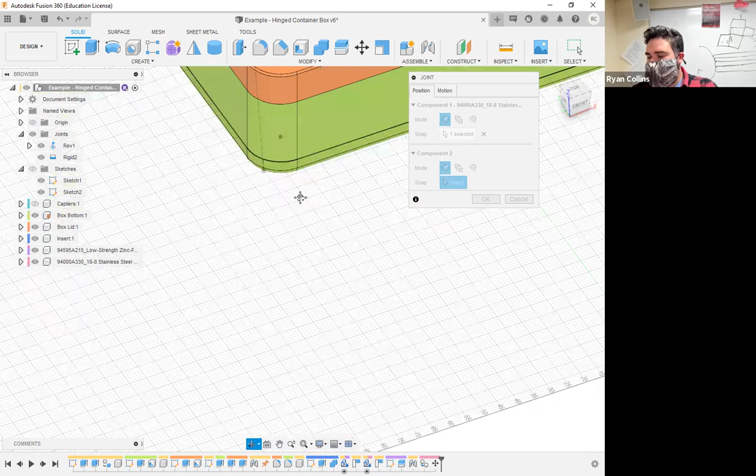Now, technically I want it right in the middle of that threaded rod. So I'm going to hide the threaded rod so I can see what I'm doing. Press and hold control, mouse over the plus. Whoop, nope, it's got both of them. That is problematic. All right, I hit OK.

The problem is it accidentally took both components rather than just one body. So let me find out which one is not the one I want. And with that, I am going to select that body and simply add that as a new component, or kick it out to a different component. There we are.

So let me just move that out of the way there, so again I can see what I've done. So what I did is I just simply created that as a new component. That's all. No big deal.

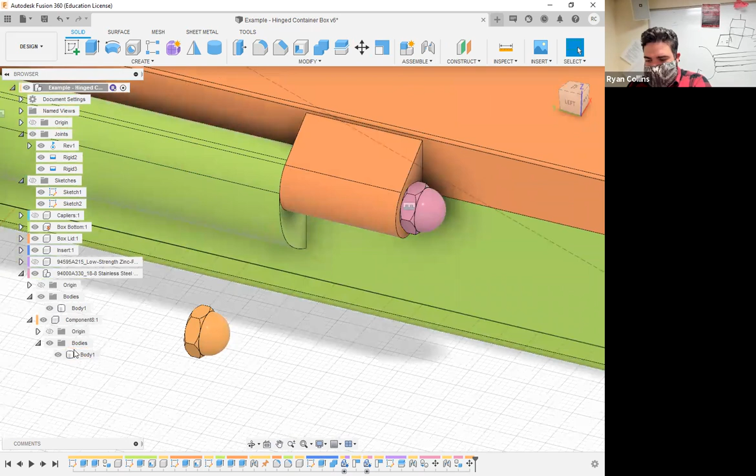Okay, another joint, still rigid. Mouse over the bottom. Oops, mouse over the bottom, press and hold control. Threads sometimes just really give hell. There we go. Back over here. Mouse over the surface, press and hold control, snap to there. New one snaps in place. Okay, that is what I needed to have happen.

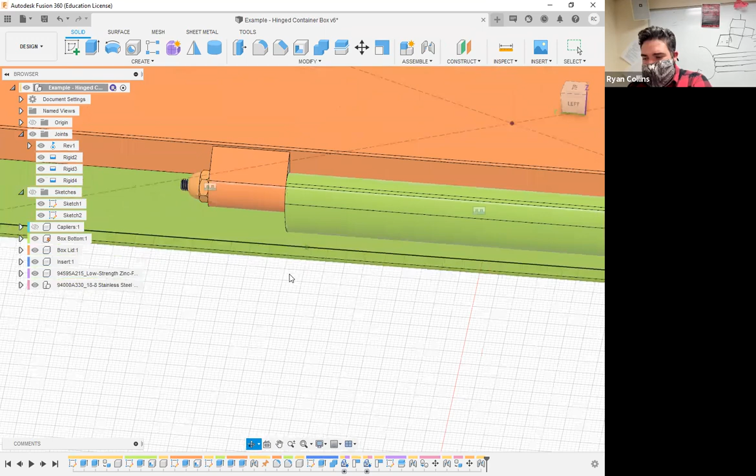Now I'm going to unhide that threaded rod. Yeah, so the threaded rod is definitely a bit too long. I will have to trim that down. Or I could have just used a nut that had a pass through rather than that. But there we go, that's pretty much what I was going for. Let me go ahead and save.

Hardware added. Now this container has a top and bottom, connected with the hinge, specifically to hold those calipers I quickly modeled. I made that insert separate, so if I went to print this, I could print it all separately and always change out the insert. This is a good way of working with something like this, so you wouldn't have to have it locked in place. Same thing if I wanted to later use the same container for dividers or something—easy way to do stuff like that.

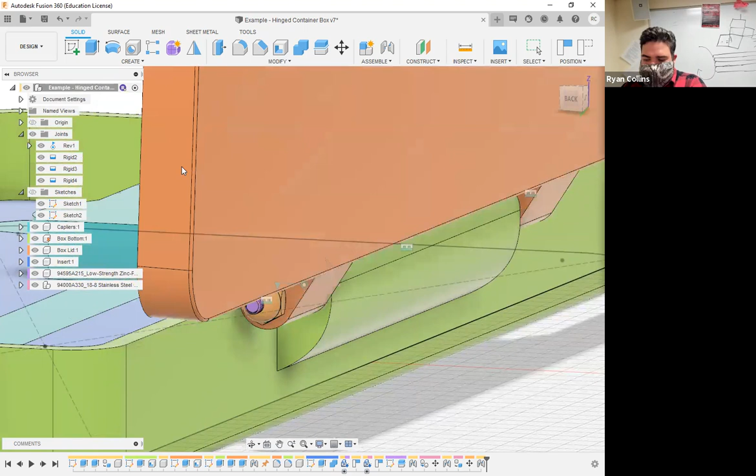Lid moves, hardware stays put. Actually, if you look close, because I snapped the hardware to the lid, the hardware is actually linked to the lid itself. I'll have to trim the threaded rod down a little bit more—probably should have kept it at 150 instead of 155, but whatever. So there we go, and I'm going to leave the lid partially ajar.

So yeah, it's a simple box, but there's still a lot of stuff to model. Again, this is really simple in that I'd expect you to have more parts to this. Especially, I want to model a couple of tabs onto this, which could be as simple as just a little thumb tab.

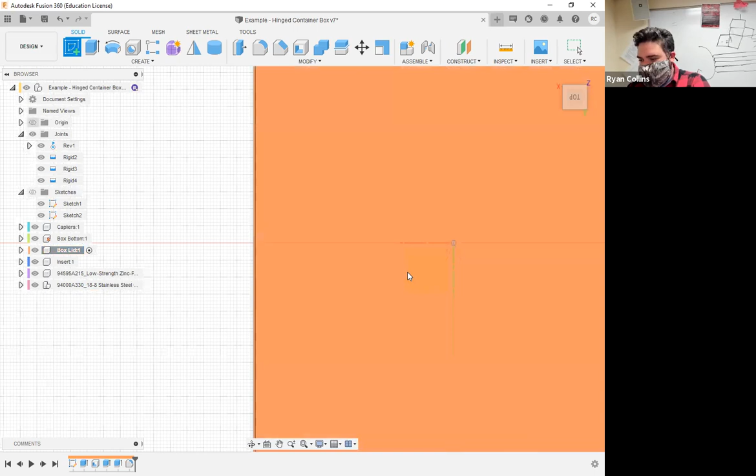Something like—let me close the lid here and capture the new position. Reactivate the box top, and add a sketch to the origin sketch. I can't see what I'm doing because everything is in the way. There we go.

I'm just going to add something like a little half circle—let's make that 15. What just happened? Oh, because that's down at the bottom. Oh right, because that was at the sketch thing. That's okay.

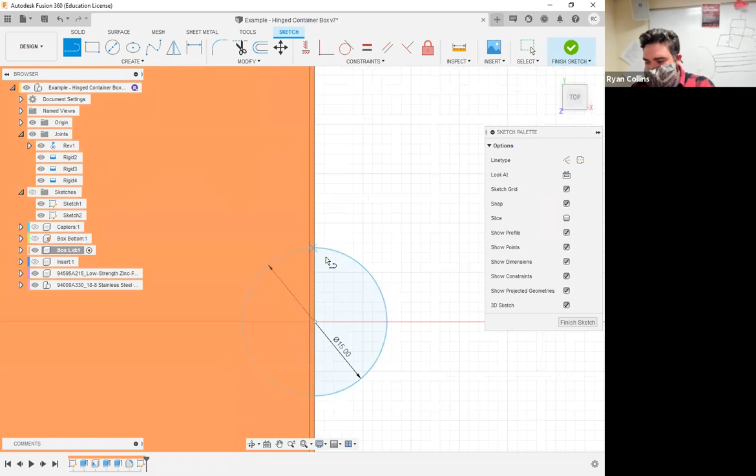So now, since I accidentally did that, I need to go back and adjust that sketch. What I forgot is I don't know why it keeps flipping around like that. Since that is all the way at the bottom, I do need to create a halfway point, so we'll just draw a line between there. Really doesn't matter what I'm doing there, just that way it's now two separate things.

There we go. So now, because all I wanted is just that little thumb tab there, box lid, extrude that box lid to that. But I want it to start at an object, which is the bottom of that. So now as I extrude it, it will start appearing right there, and we'll make it like 2 millimeters. Cool, so now that's obviously going to join. Great.

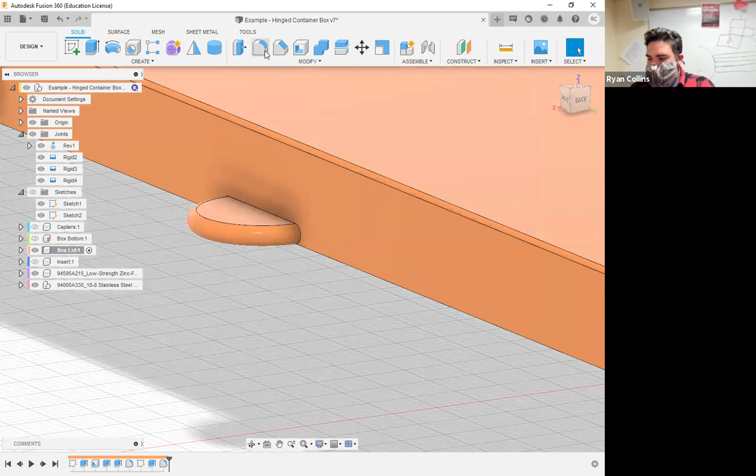Something like that—you definitely want to add a fillet between those points. Let's say like 1, might be too big. Yeah, something like that, that works nicely. Or tell you what, instead we cancel that one—full round. I'm going to select the outside there. Ooh, roundy part. Click OK. Another fillet, I just want right there, that corner—say 1, see what it says.

Great. So like I said, the full round was just a nice feature, but as I was saying, design features are things to make your parts stronger. If this were just left as a straight corner tab, it would break off a lot easier. But now that I've added this fillet around this little tab, it would hold on much better just because there's extra support material around it. Select OK, reactivate the whole thing. And now there's just a little tab that holds so you can open the bottom or the top.

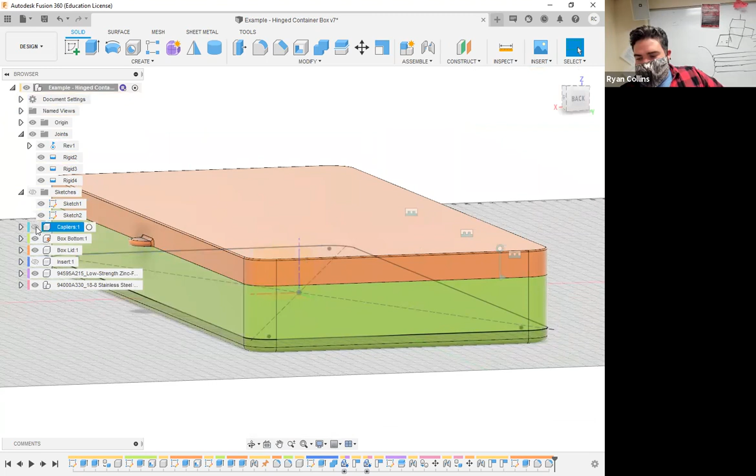That's all, so it's just a nice little feature. Things like that—I highly recommend adding things like that, but it depends on what you're building. Again, this is simply something that I could open up and, oops, have a container for a thing. So that's pretty much what you're going for: a dedicated container holding something specific. The model doesn't have to be exact inside—it's much more about making reference to what you're holding. But same thing, some sort of open and close, hinge, imported parts, joint, all of that fun.